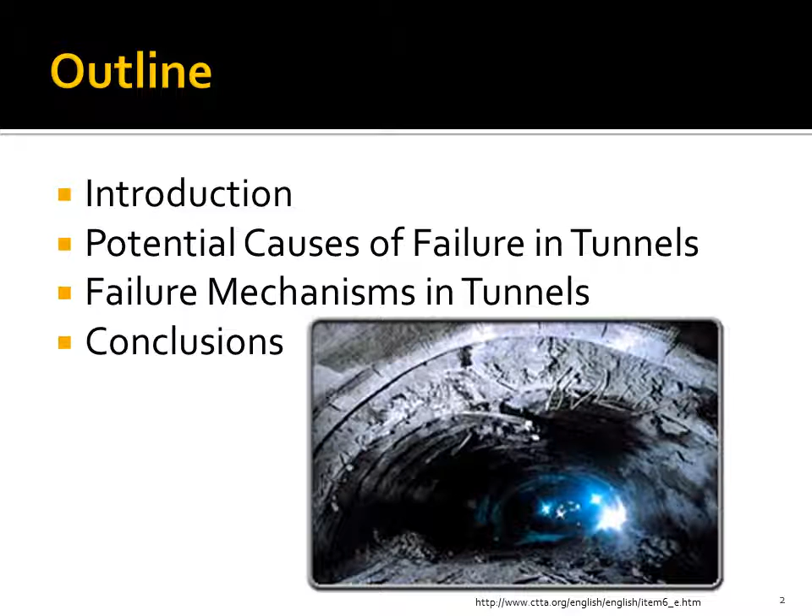Failure mechanisms for tunnels in rock, presented by Vishal Patel and Haitham Daoud for Geological Engineering class taught by Professor Matthew Mauldon at Virginia Tech in fall 2011. The outline of our presentation will be the introduction, the potential causes of failure in tunnels along with failure mechanisms, followed by conclusion. We'd like to begin talking about the tunnel collapse by referencing a few very true quotes.

As Sir Michael Latham once said, no construction project is risk-free. Risk can be managed, minimized, shared, transferred, or accepted. It cannot be ignored. This is all very true for tunnel construction, where an error can have a major impact to the project and lives of construction workers. So whenever a tunnel is constructed, the risk that comes with it should not be ignored, and everything should be done in order to minimize the risk.

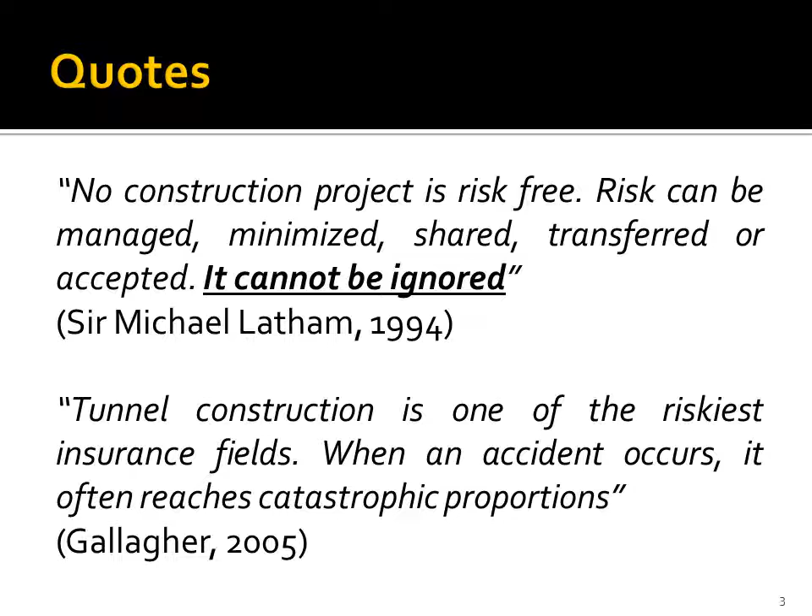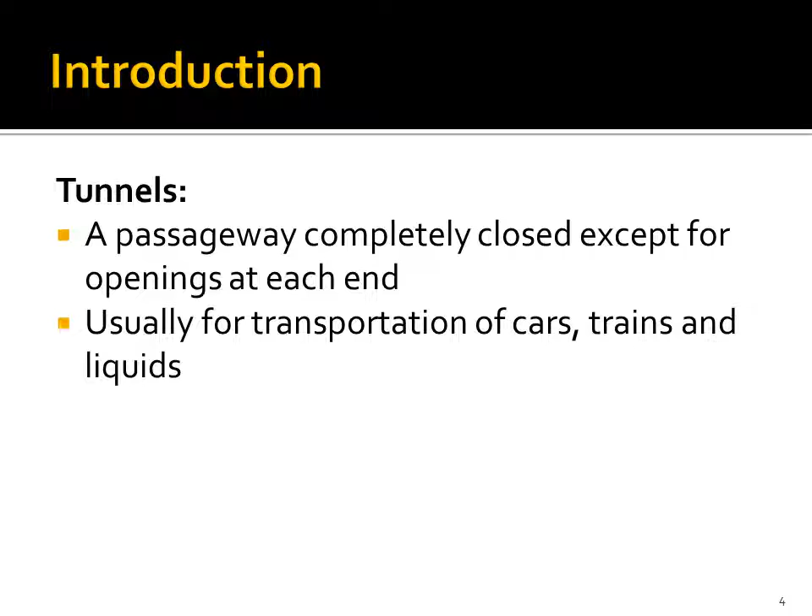Another important quote by Gallagher states that tunnel construction is one of the riskiest insurance fields. When an accident occurs, it reaches catastrophic proportions. Again, these quotes emphasize how tunnel construction is one of the most risky fields to be in. So what is a tunnel? A tunnel is a passageway completely closed except for its opening at each end. Tunnels are usually used for transportation of cars, trains, and liquids.

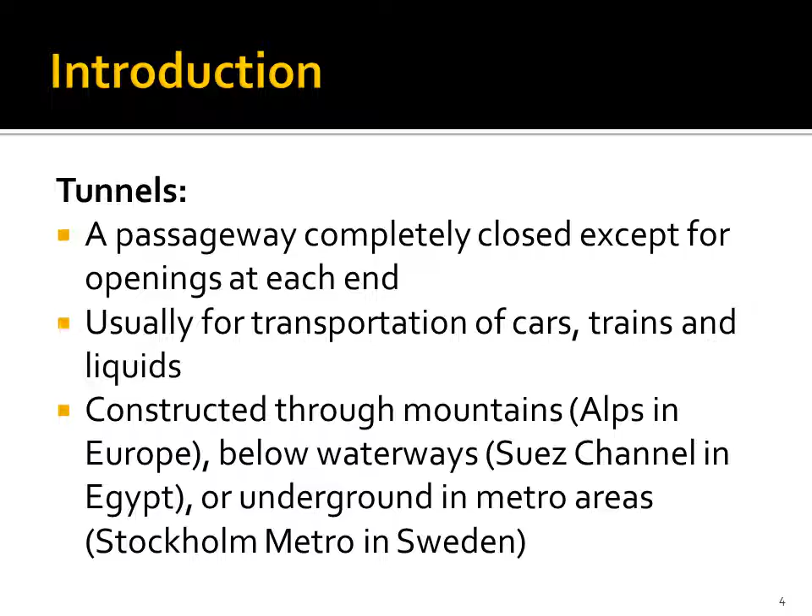They're constructed through mountains, below waterways, or underground in metro areas and have massive economic impact. Tunnels allow for faster and, in some cases, safer routes to a destination. Tunnel collapse plays a major role in the safety of our infrastructure and, more importantly, the safety of the public. Tunnel collapse can be defined as a breakage of material from the tunnel perimeter resulting in change of tunnel cross-section. Tunnel collapse is dangerous on many levels to the public and existing infrastructure.

The wide range of potential failure causes and failure mechanisms is partly the reason why the risk associated with tunnel construction is still high. Thus, in this presentation, we will discuss potential geological causes of tunnel collapse, followed by a comprehensive list of failure mechanisms of tunnels excavated in rock. Several historic cases are also presented in relation to the associated failure mechanism.

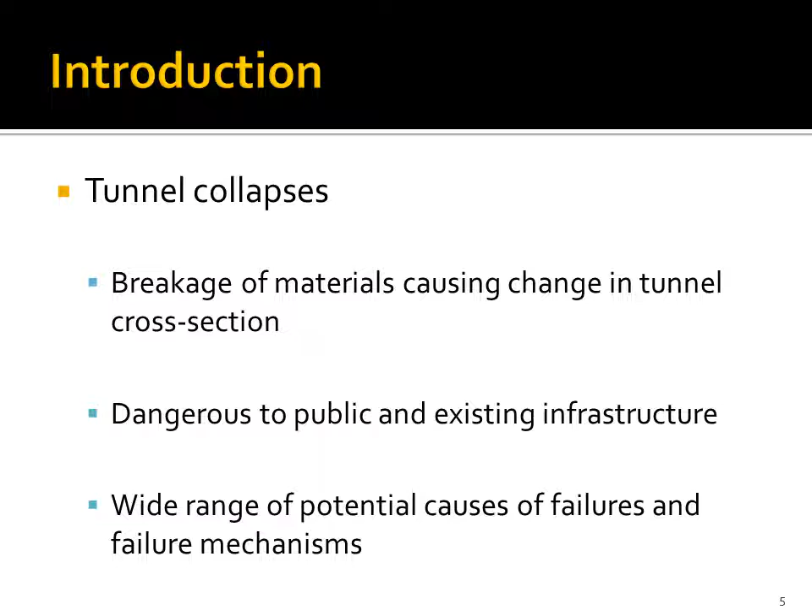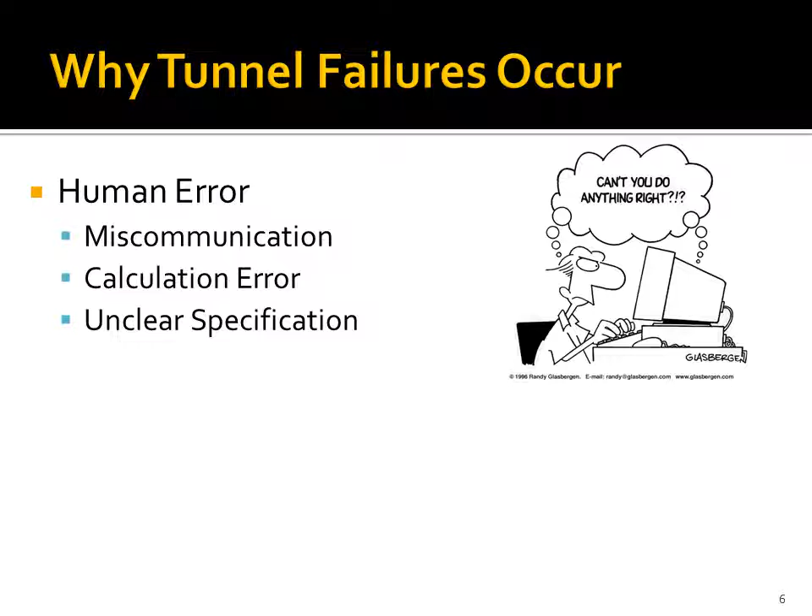With construction of any tunnel, there is always a risk of failure due to human errors and unknown geological formations. While human errors consist of miscommunication, calculation error, not following safety precautions, or bad project timing, human errors can be minimized through improving on past mistakes or not making them. But geological heterogeneity is tougher to predict and handle because it can happen on massive scales. Weathering, folding, and groundwater presence can alter the behavior of rock mass around the tunnel, making it incomprehensible.

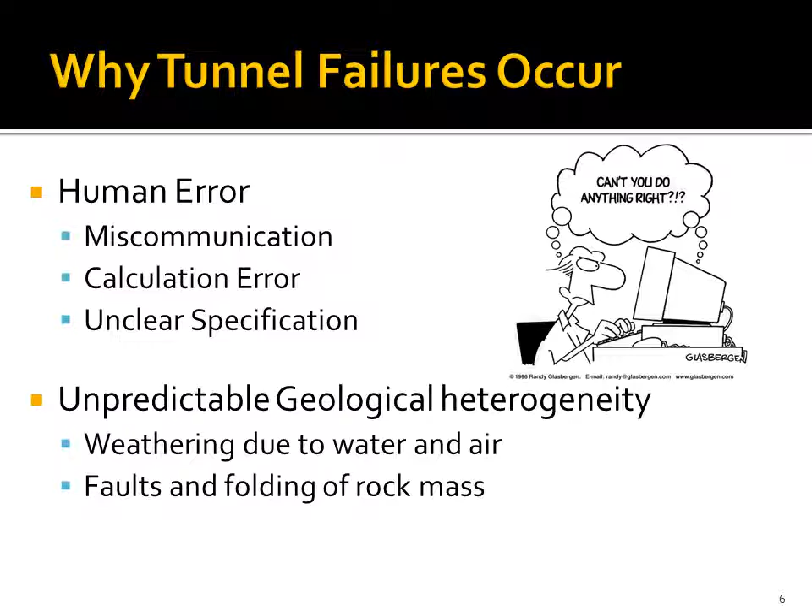Weathering of rock mass through water or air can affect great depths and decrease the strength of rock. Water flow through faults and joints can erode materials between two masses, making them loose and susceptible to failure if tunneled through. Faults and folding of rock mass can have high and low fluctuating stresses over a geological map. Faults and folds are hard to deal with during construction of a tunnel due to rock bursting under high stresses.

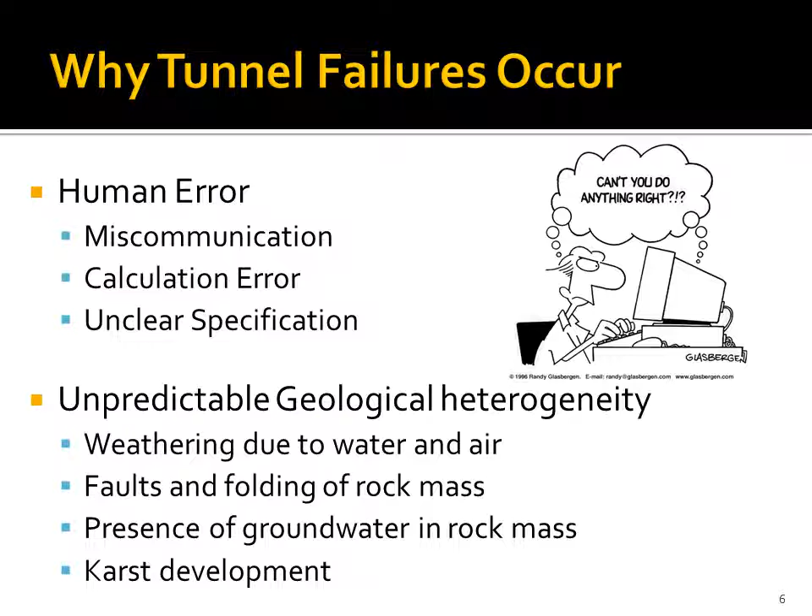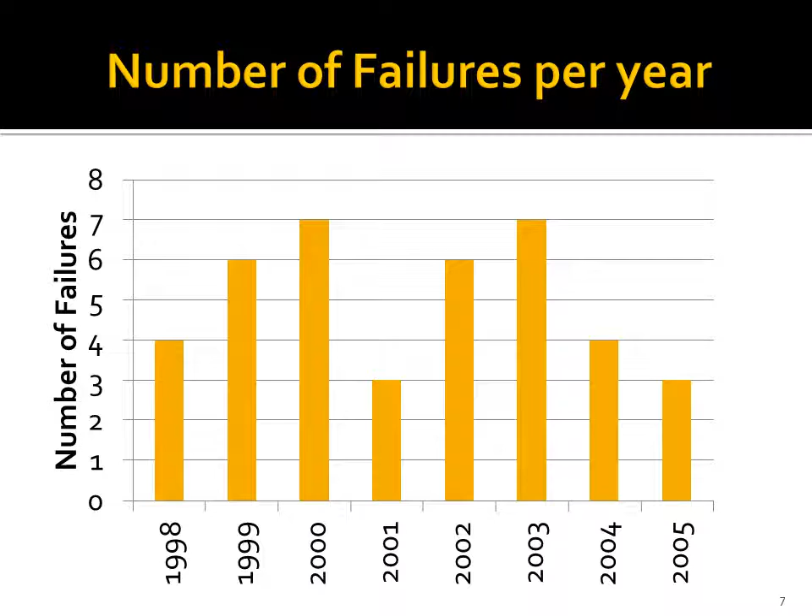Groundwater can create hydrostatic pressure near the face of the wall if it has not yet burst through. It can also form karst if water is present near soluble rocks such as limestone, which can create cavities in the tunnel, leading to failure of rock mass near fractures and joints. A study conducted in 2006 shows the following number of tunnel failures during the past several years. In many cases, tunnel failure caused delay of work, redesigning of the tunnel, change in construction method, or creating a bypass tunnel around the failure zone.

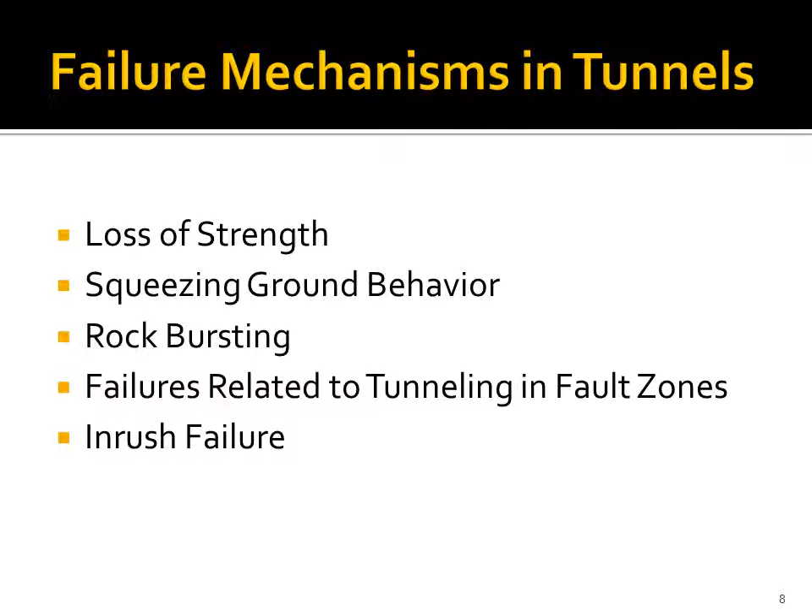Whenever a tunnel failure occurs, there is a combination of one or more failure mechanisms associated with it. Failure mechanisms such as loss of strength, squeezing ground behavior, rock bursting, failure related to tunneling in fault zones, and inrush failure will be discussed. Loss of strength can result from blast damage through creation of new fractures or expansion of old ones by explosives. Although blasting is specifically designed to create fractured rocks for an easier method of excavation, the impact from blasting may occur outside the tunnel radius, permanently reducing strength around the tunnel perimeter.

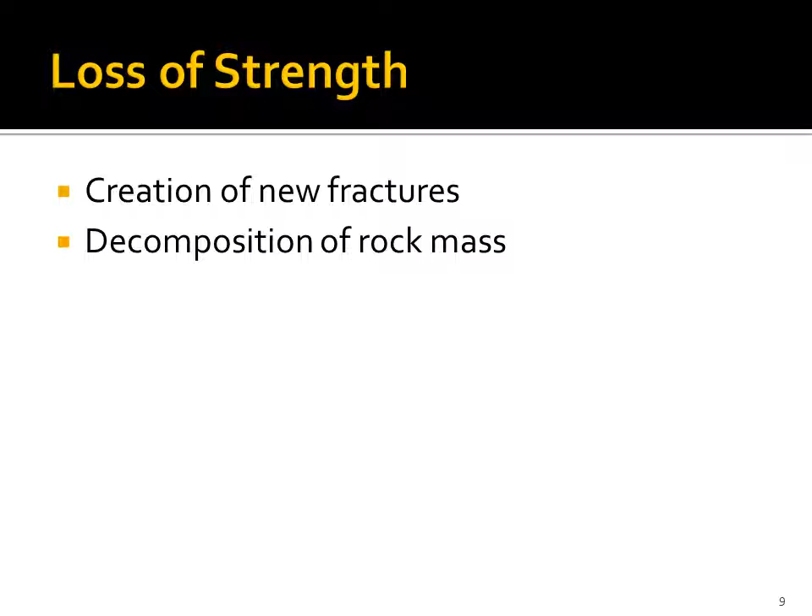The exposure of some rocks to water or air can lead to weathering decomposition, which leads to loss of strength, resulting in failures and construction delays. The Wienerwald Railway Tunnel extension in Vienna, Austria is a good example of failure due to water interaction with rock mass. During construction of the tunnel in a flysch zone, isolated water buildup in certain layers of rock was exposed when workers drilled boreholes for roof bolting.

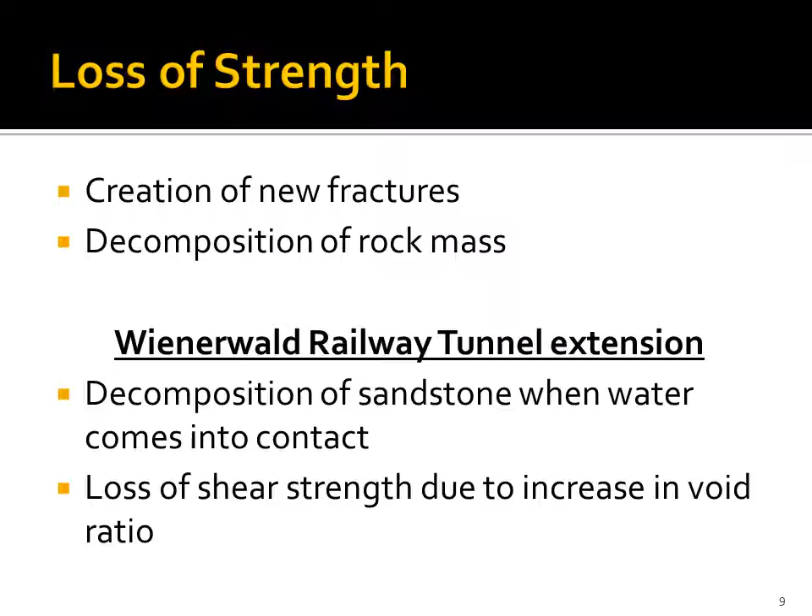Water was exposed to sandstone due to the pathway created by the borehole, and the interaction of water with the sandstone layer caused decomposition and loss of shear strength due to increasing void ratio. Thus, the failure of the tunnel was unavoidable due to loss of shear strength and increase of pressure around the tunnel. Squeezing rock slowly advances into the tunnel without perceptible volume increase. Many geologic environments result in squeezing behavior.

Yacambú-Quibor Tunnel, located in the Andes, Venezuela, is a good example for the effect of squeezing rock on tunneling. This tunneling project is considered by many as the most difficult in the world. The squeezing rock trapped the tunnel boring machine in 1979, and its remains were removed years later. Some sections of this tunnel were completely closed by squeezing rock.

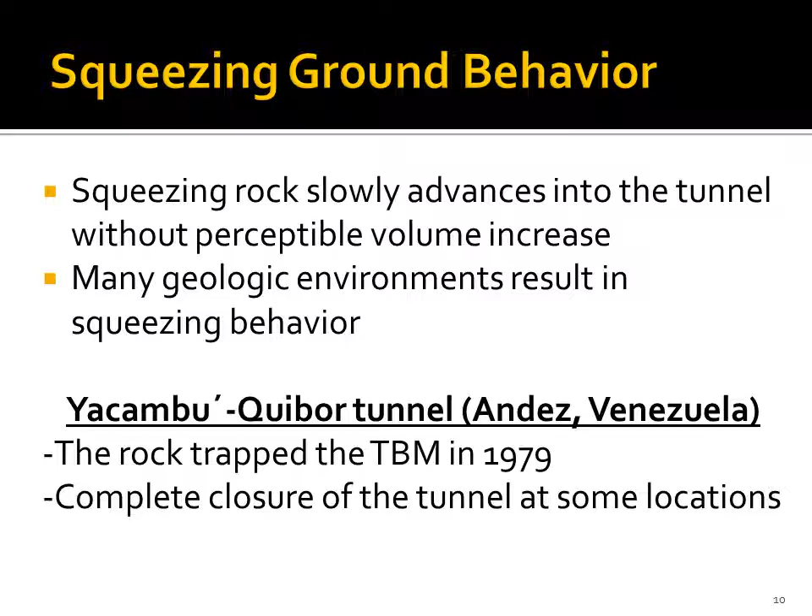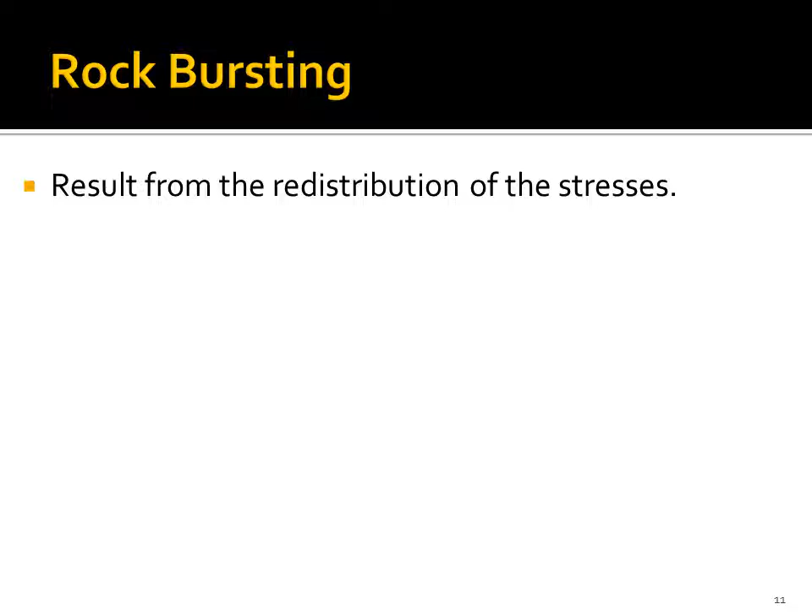Rock bursting. Rock bursting mainly occurs due to the redistribution of the stresses due to the excavation of tunnels. Many factors contribute to the occurrence of rock bursting. For example, the mechanical properties such as density, porosity, permeability, and strength of the rock. The geologic structure, such as the joints and folds in the region. The tunnel's size, shape, and orientation. Also, the stress in rock is an important factor, as rock bursting generally occurs in regions of high stress concentration.

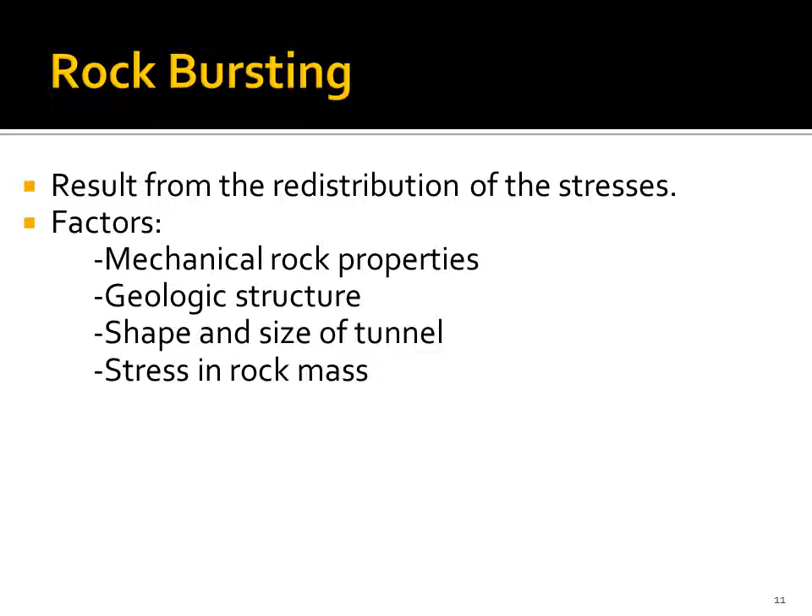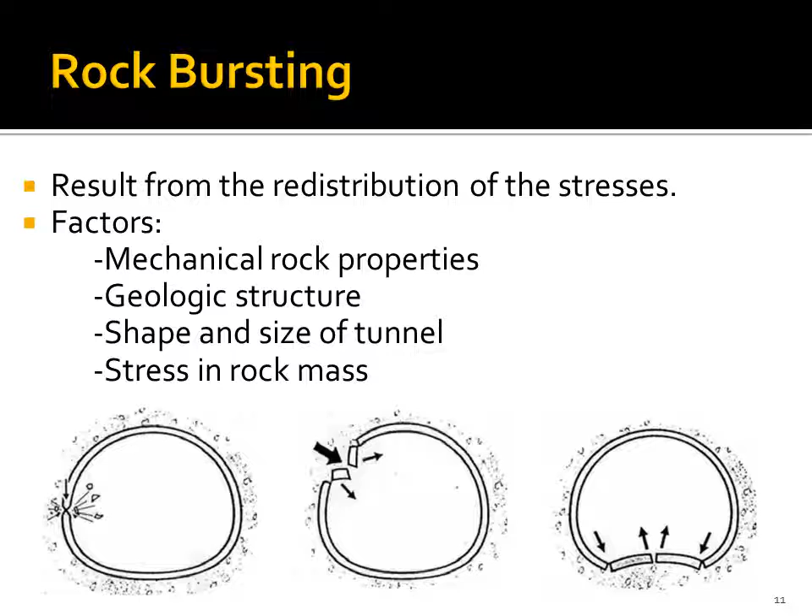The figure shows the different failure modes in tunnels as a result of the bursting rock behavior from left to right. The first figure is a compression failure, the second is a punching failure, the third is a combined bending and thrust failure.

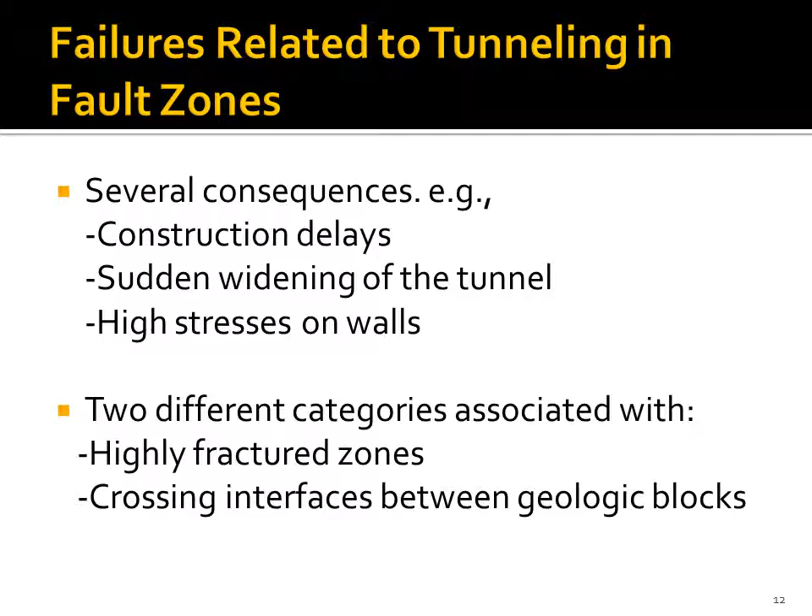Failures related to tunneling in fault zones. In general, tunneling in fault zones is difficult and challenging. Tunneling in fault zones is generally associated with substantial construction delays, sudden failures, widening of tunnels, and concentration of high stresses on the lining. Tunneling in highly fractured zones and crossing interfaces between geologic blocks are the two different subcategories associated with this failure mechanism. Highly fractured zones have a low Q value and small stand-up times.

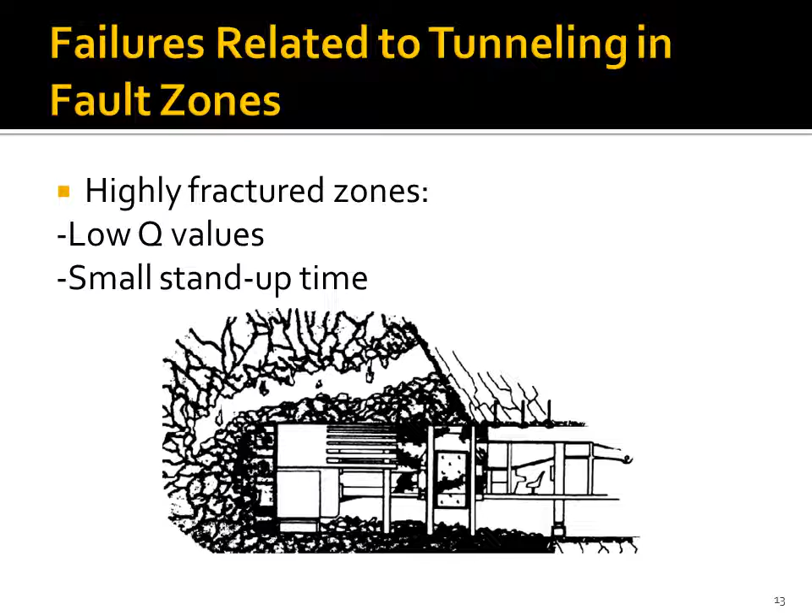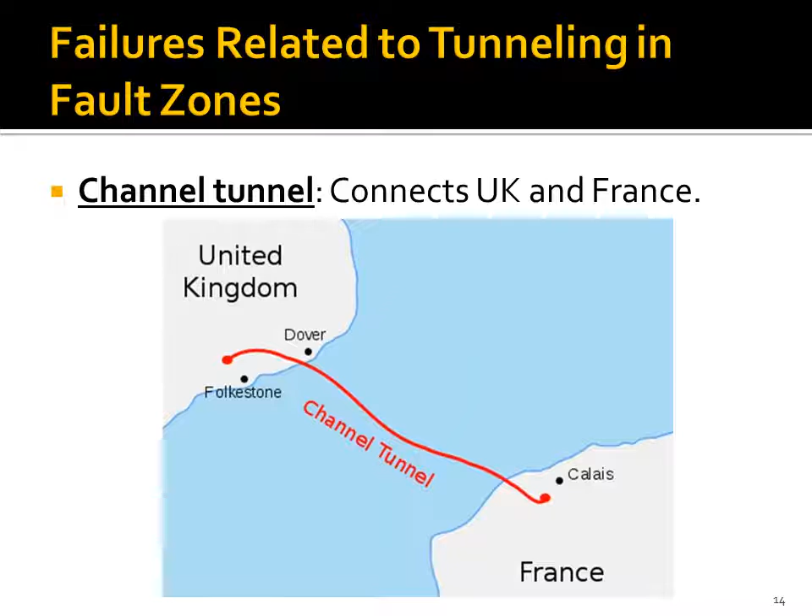This figure shows a typical failure in highly fractured zones. The rock suddenly falls down, trapping the boring machines and widening the cross-section of the tunnel. The Channel Tunnel is a good example of tunnels that pass through highly fractured zones. The Channel Tunnel is a 50-kilometer undersea rail tunnel linking Folkestone, Kent in the United Kingdom with Coquelles, Pas-de-Calais in northern France, beneath the English Channel at the Strait of Dover.

Tunneling in the fractured zones slowed down the advancement rate, resulting in substantial construction delays. The regular advance rate was about 334 meters per week, while in disturbed zones it was as low as 127 meters per week, which is about 38% of the regular advancement rate. In an extremely disturbed zone, the advancement rate was about 8 meters per week, which is only 2.4% of the regular advancement rate. Even with substantial construction delays, failure was avoided.

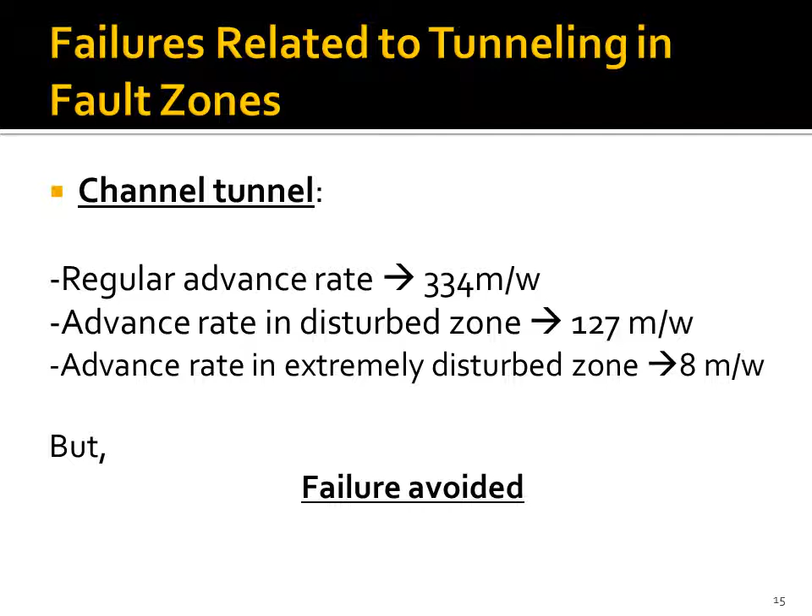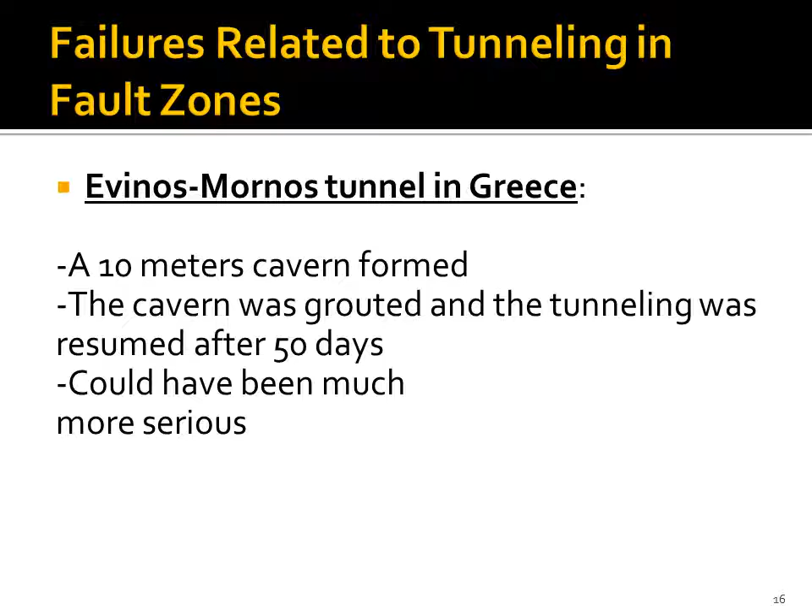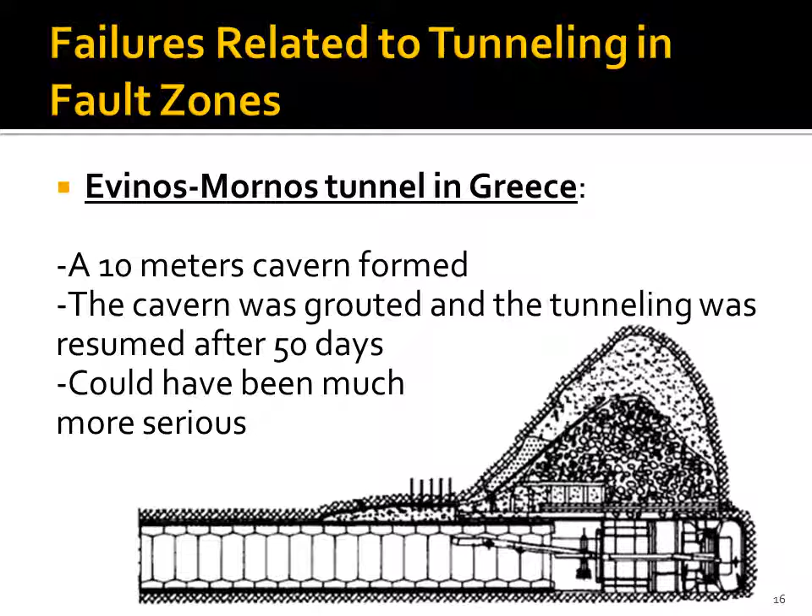Another example is the Evinos Mornos tunnel in Greece. In this case, 10 meters of rock above the tunnel boring machine fell down, forming a large cavern. As shown in the figure, the cavern was grouted. Then the boring machine continued its advancement after the grout set. This resulted in 50 days of construction delay. The delay could have been more serious if a larger cavern formed. In this case, failure was unavoidable.

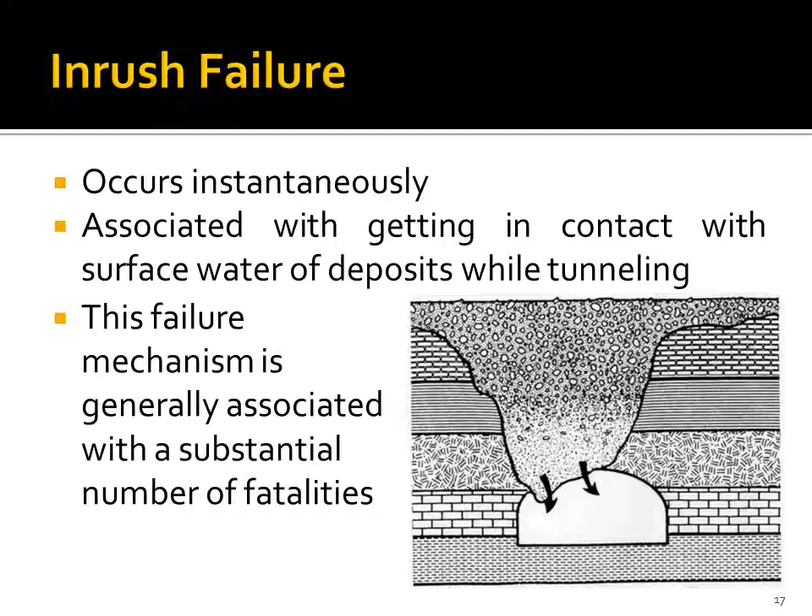The inrush failure mechanism occurs almost instantaneously. As shown in the figure, this failure occurs when the tunnel gets in contact with surface water or unconsolidated soil deposits during construction. It results in a sudden inundation with a mixture of water and soil and results in a substantial number of fatalities.

The current investigation aims to present the main causes of failures and the failure mechanisms associated with the construction of tunnels. The following are some concluding remarks. Geologic investigations are the cause of a lot of problems associated with tunnel engineering. Hence, care should be taken in performing such investigations, and uncertainties associated with these investigations should be carefully evaluated and considered. Learning from previous mistakes is important. Hence, the large failures database in tunnel construction is an invaluable resource that should be extensively used during the design and construction of new tunnels.

Tunnel engineering is usually associated with a lot of uncertainties and risks. Hence, all possible case scenarios should be studied and evaluated carefully before and during the construction phases. It's important to constantly monitor the behavior of the tunnel during and after construction, because failure can occur at any time. Emergency plans must be prepared to be adopted in case of any sudden problems. Tunneling projects are generally very large and involve many parties from different fields at different stages of construction. The communication between these parties is critical for a successful tunneling project.